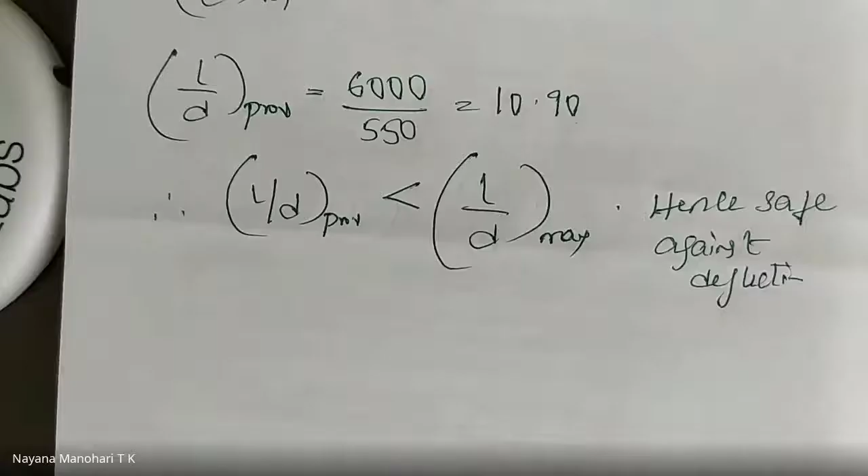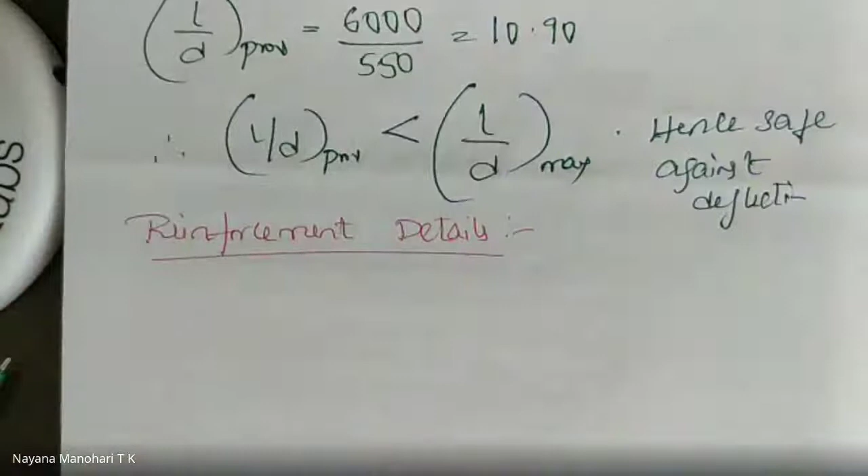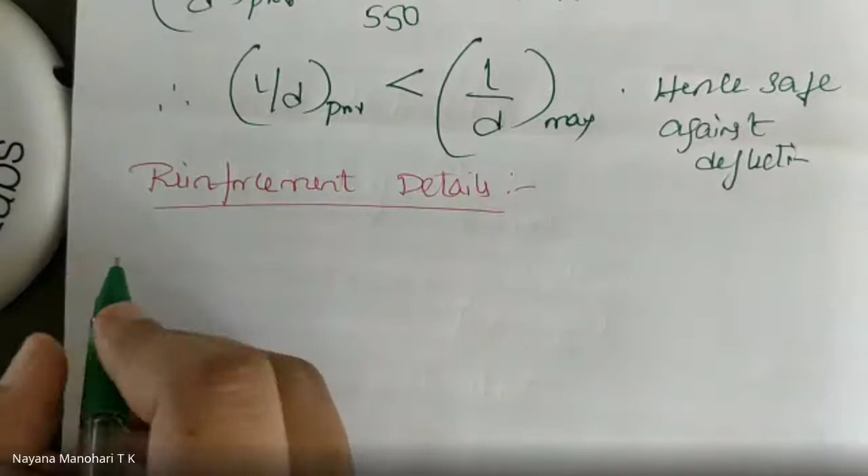You need to draw, that is, the reinforcement details. Reinforcement details, the last step. You need to draw both the longitudinal section as well as the cross-sectional details of the reinforcement. First, I am going to draw the longitudinal section. Okay.

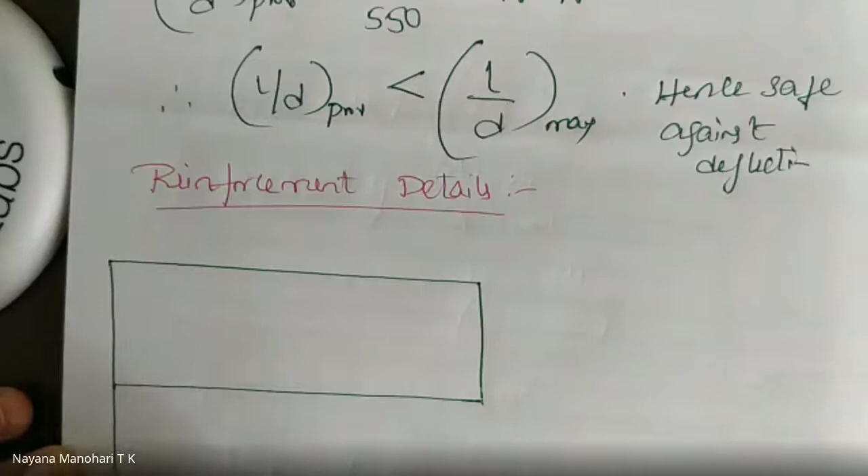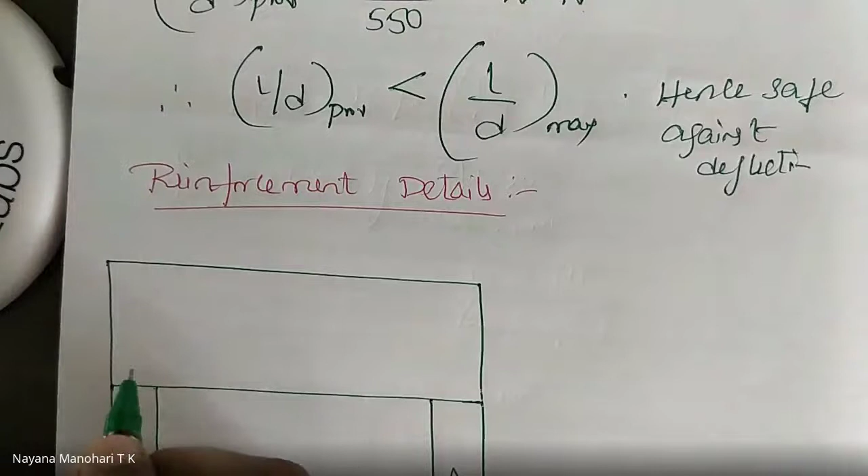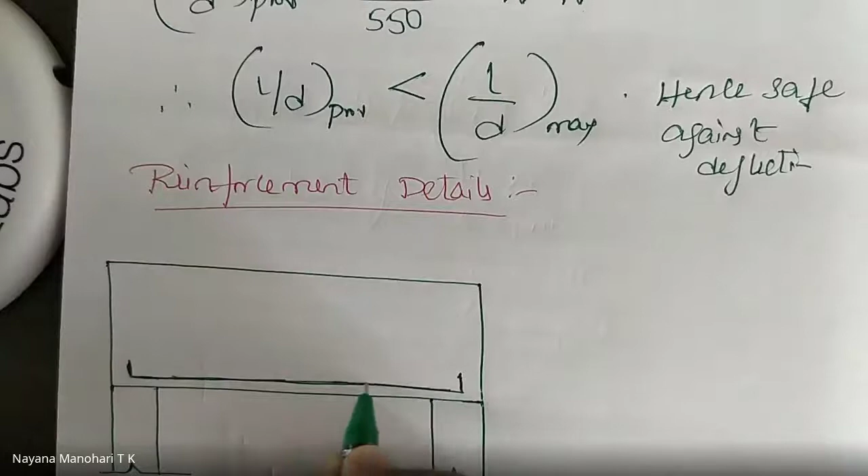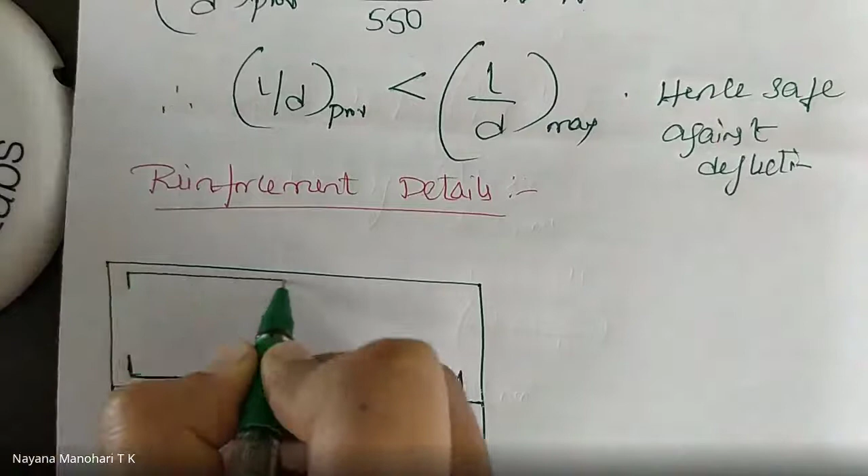Show the support, the width of the bearing or the width of the support they are going to provide. Next, they are going to provide the reinforcement at the bottom. That is the main bar you have calculated, 5 bars. Show the reinforcement in a thicker line. And at the top also they are going to provide the compression reinforcement for the doubly reinforced beam. Show it in a thicker line.

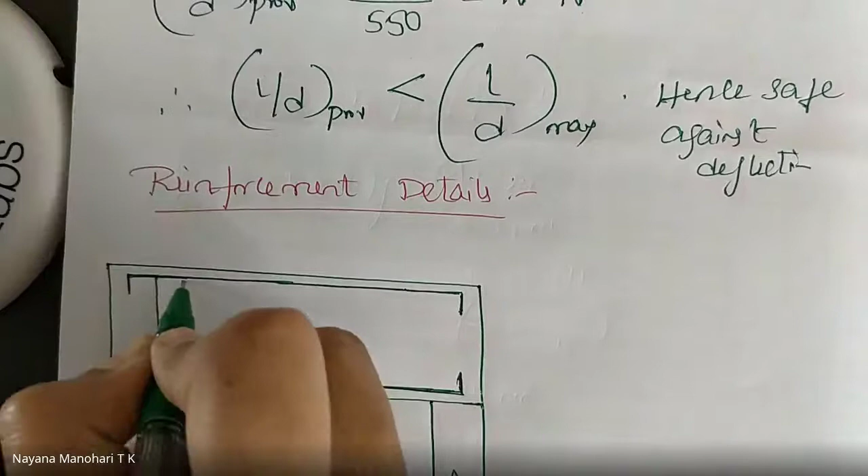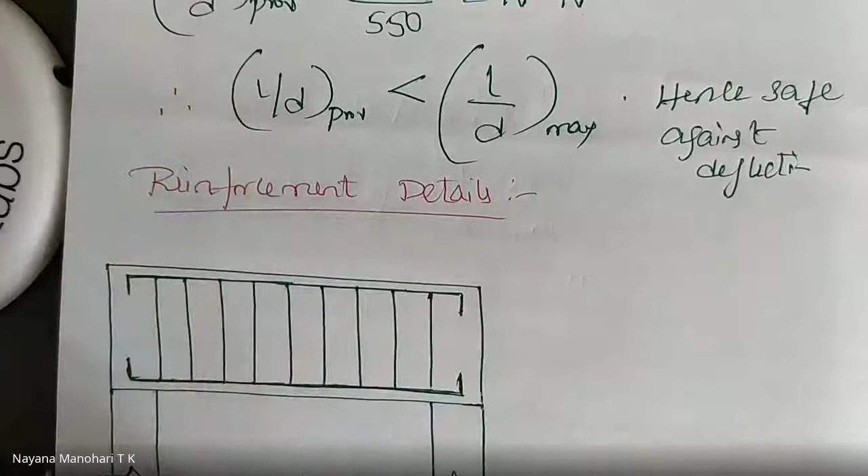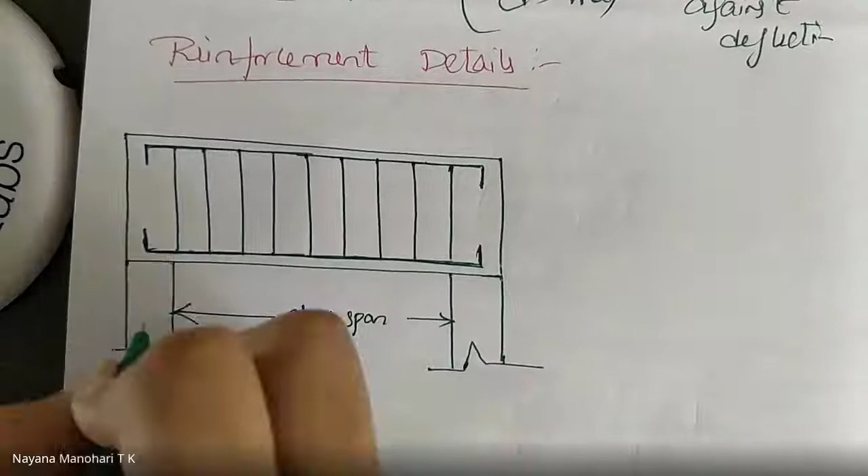Next, stirrups you are going to provide. When you look at it from the front, it will look like a vertical line. This is your clear span. Effective span means center to center distance of the supports. This you call the effective span, which is equal to 6 meters, given in the problem.

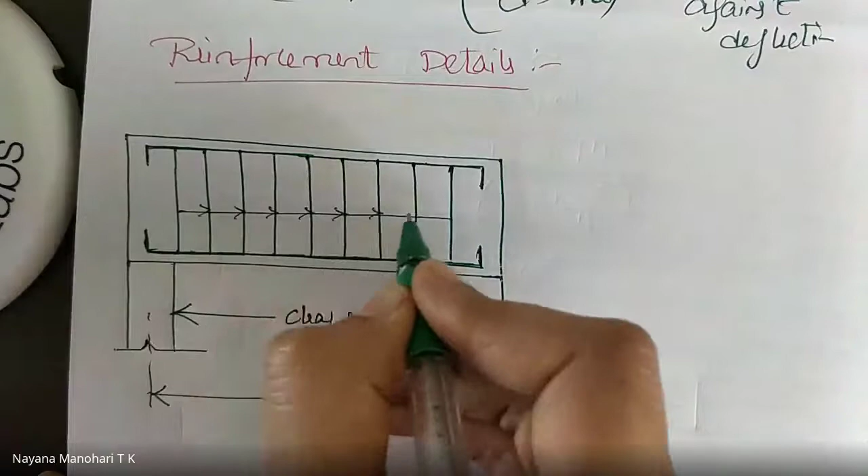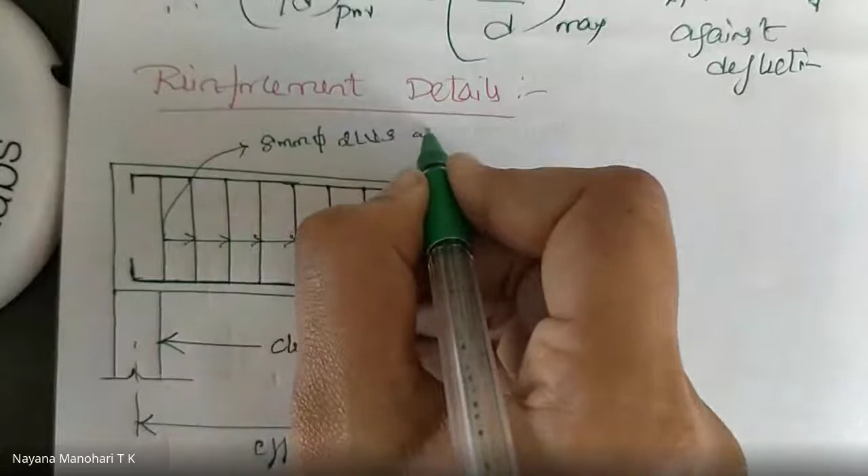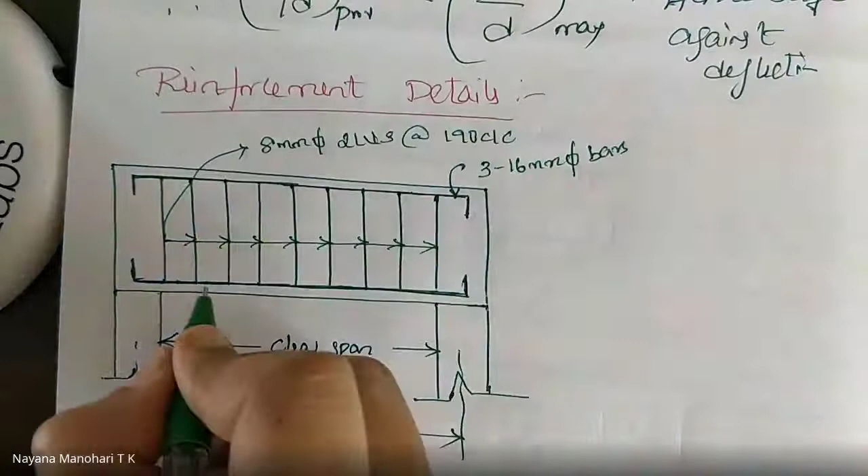These are all the vertical stirrups. The dia of the vertical stirrup is 8 mm dia, 2-legged vertical stirrups at 190 center to center. Similarly, the compression reinforcement is 3 bars of 16 mm dia bars, and the main bars are 5 bars of 22 mm dia bars. This is your longitudinal section, LS.

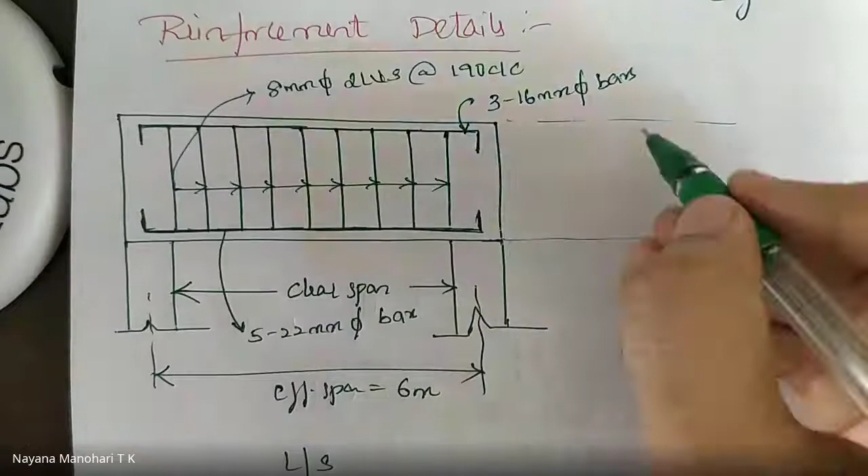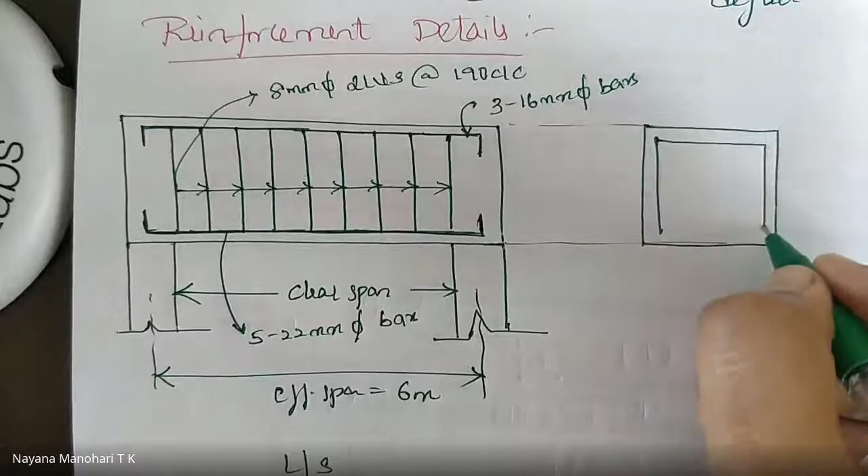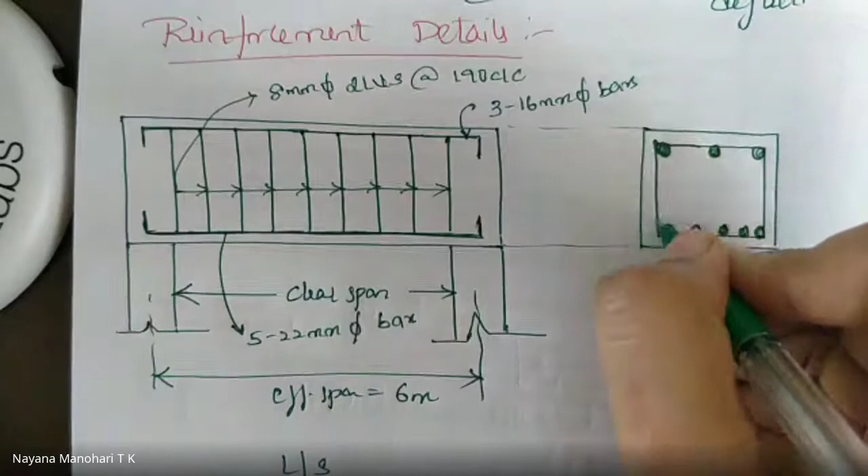Similarly, you need to draw the cross section. When you cut it, you need to provide the cover inside. Next, the main bars: 5 bars, 1, 2, 3, 4, and 5. 5 bars at the bottom, and at the top 3 bars. Stirrups they are going to provide, 2-legged, with a hook. This is your stirrups.

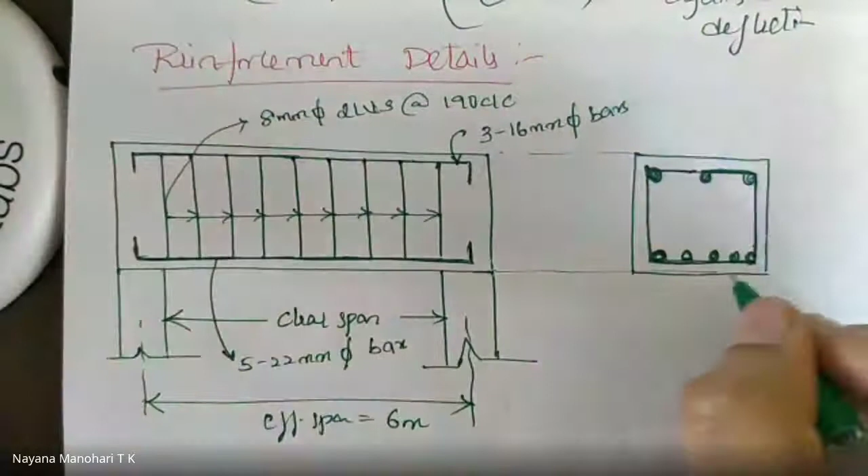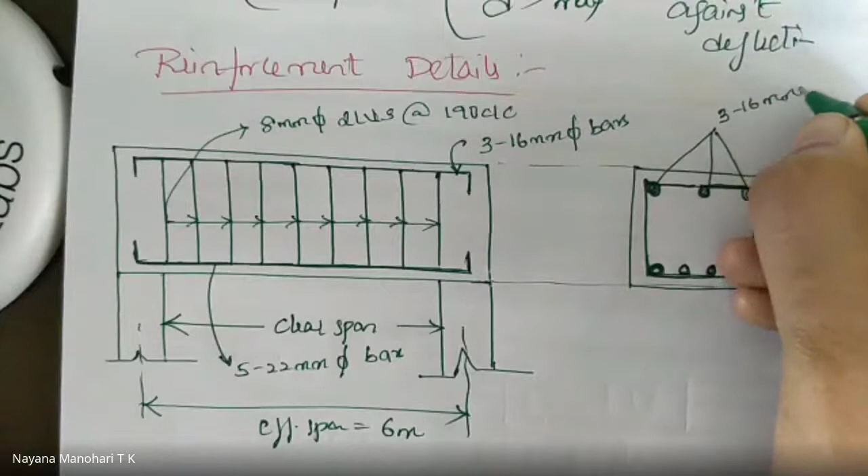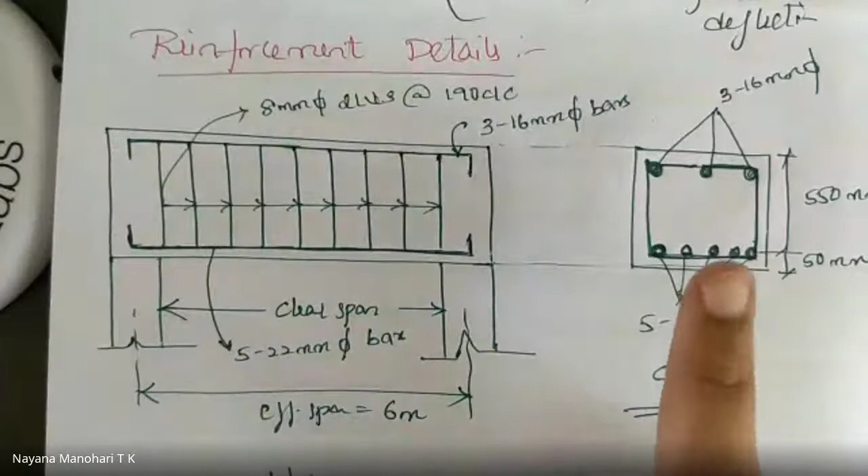This is your effective cover, given as 50 mm. This is your effective depth, 550 mm. All the 3 are 3 bars of 16 mm dia, and all these 5 are 5 bars of 22 mm dia bars. This is the cross section of the doubly reinforced beam. This is your longitudinal section, and this is your cross section. This completes the design of doubly reinforced beam.

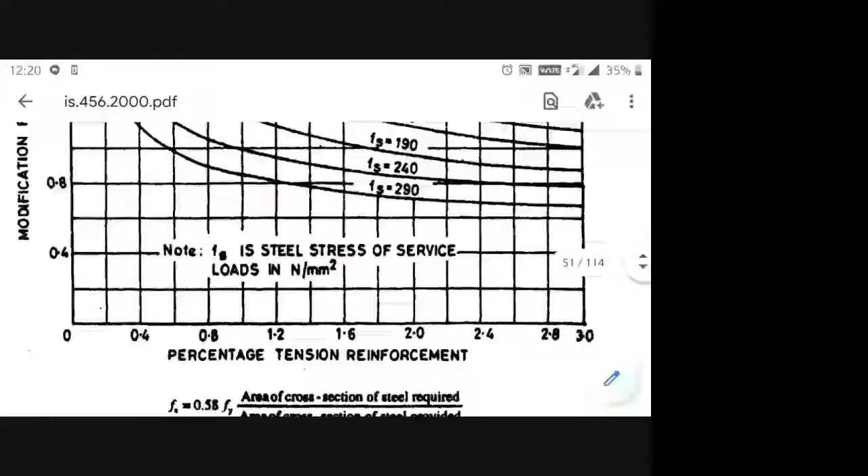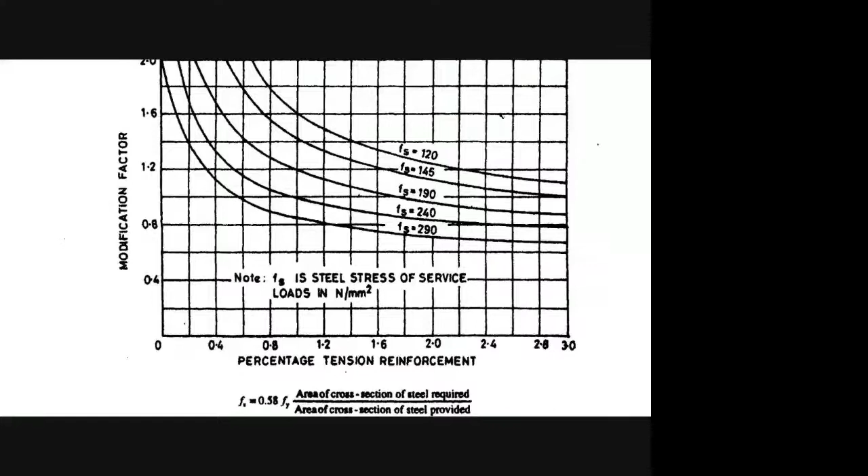This graph is to calculate the modification factor due to tension reinforcement, page number 38, figure 4. The percentage of tension reinforcement is 1.4, so it comes exactly between the 1.2 and 1.6 lines. The Fs value is 224.37, so it lies between 190 and 240. Observe the vertical line after 0.8, then 1. Where exactly will 220 lie?

Observe in this graph. I forgot to bring the code book to the class. Otherwise, I would have shown you.

1.4 lies between 1.2 and 1.6, and the Fs value is 224. After 190 it is 200, 210, 220. Then it is approximately between 0.8 and 1, around 0.9 or 0.98, near to 1. You can take it as 1 also, no issues. It's not an exact value, it is approximate.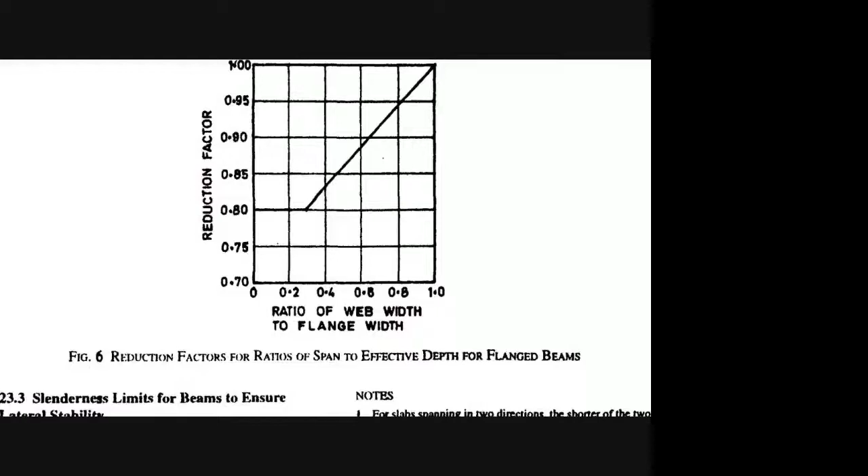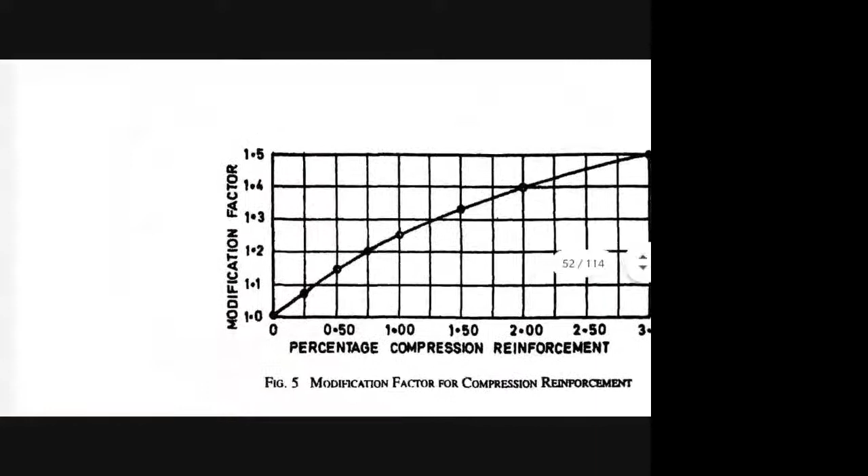0.452. Between 0 and 0.5 it is 0.25. After that, for 0.452, approximately it comes as 1.12. Observe in this figure; you should be familiar with the grid values. It is 1.12. Next is the reduction factor for flanged beams, the K3 value. This is for compression reinforcement modification factor, and this is for tension reinforcement.